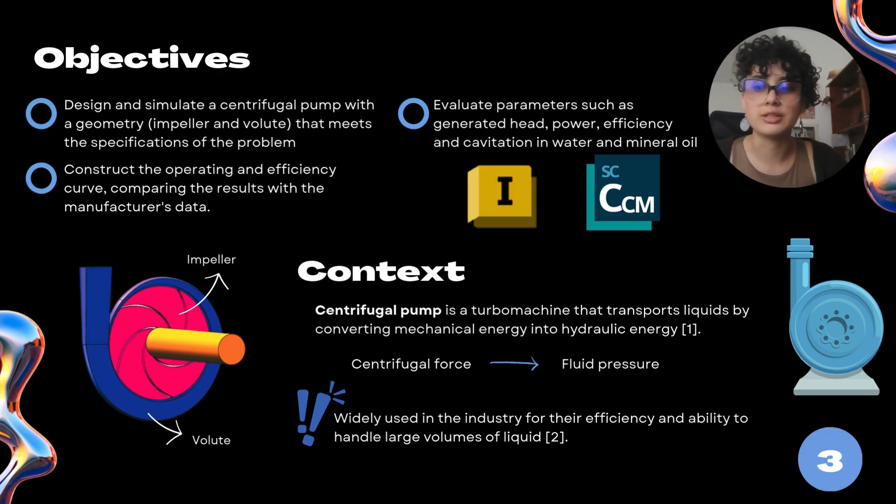A centrifugal pump is a turbomachine that transports liquids by converting mechanical energy into hydraulic energy. It works thanks to an impeller that rotates at high speed inside a volute, generating a centrifugal force that drives the fluid from the center of the impeller towards the outside, increasing its pressure.

What is CFD? Computational fluid dynamics is a branch of fluid mechanics that uses numerical methods and algorithms to analyze and simulate the behavior of fluids. However, the accuracy of these models depends on the correct selection of a turbulence model, refined meshes, and the implementation of realistic boundary conditions. The more viscous the fluid, the higher the friction loss, which reduces the overall pump efficiency.

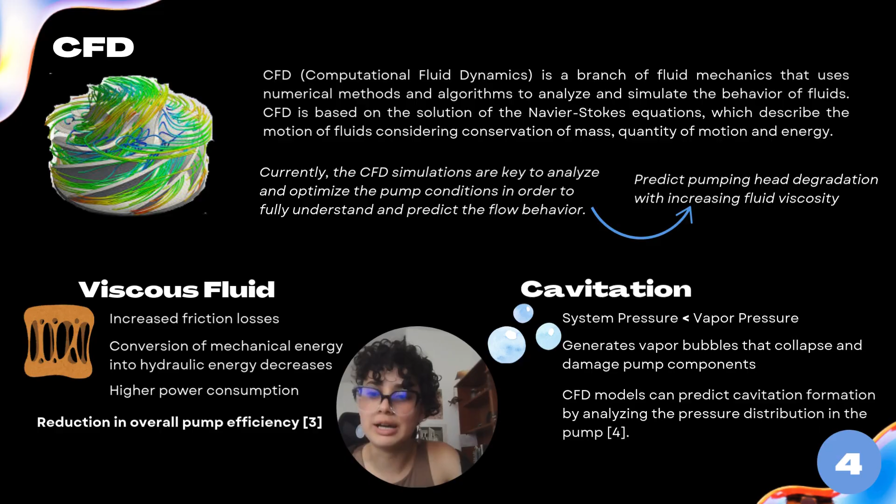On the other hand, cavitation is a common problem that occurs when the pressure in certain areas of the impeller drops below the vapor pressure of the fluid, generating vapor bubbles that collapse and damage pump components. This phenomenon can cause loss of performance, excessive noise, and mechanical failure. CFD models can predict cavitation formation by analyzing the pressure distribution in the pump. Viscous fluids tend to modify the occurrence of cavitation, as higher viscosity can delay the formation of vapor bubbles.

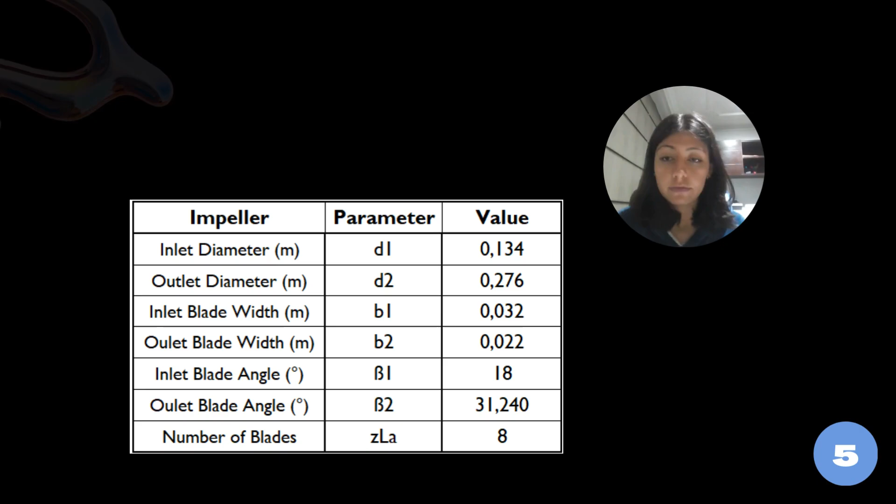For the methodology, first we find different parameters that are used to make calculations for the design of the centrifugal pump. For the mesh selection, we have different mesh assumptions.

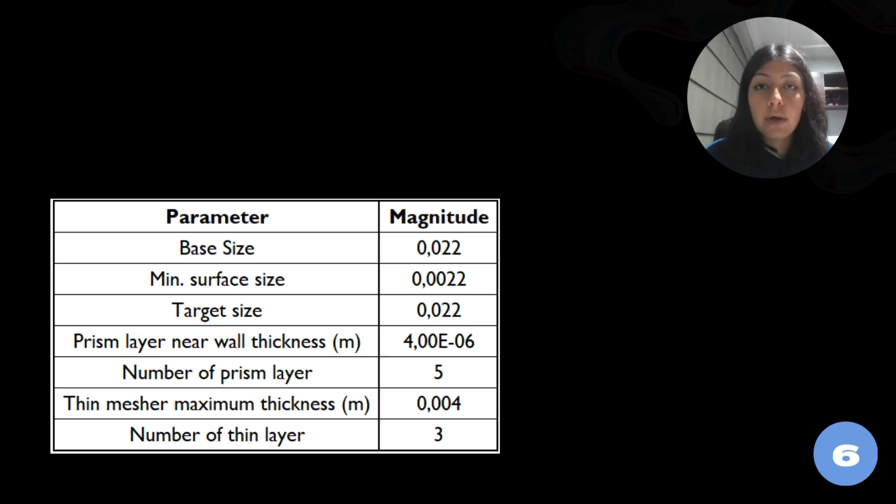In this case, we chose polyhedral meshes, which have fewer cells compared to tetrahedral meshes that, even though they have more faces, the polyhedral meshes present the same results. Next we have surface meshes that have more cells, thin meshes that have more cells in thin areas, and finally prism layer meshes that have more cells in areas near walls.

These meshes capture boundary layer effects to optimize Y plus values for turbulence models, improving velocity gradient resolution near walls, ensuring computational efficiency without excessive mesh refinement.

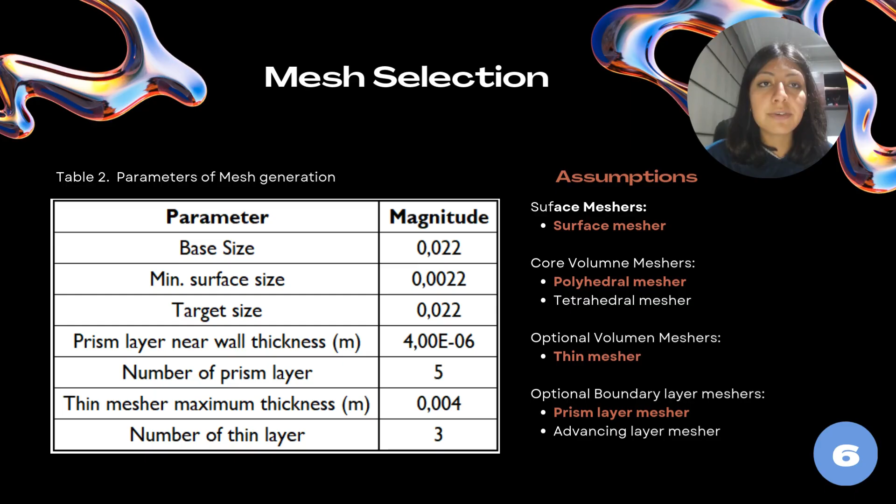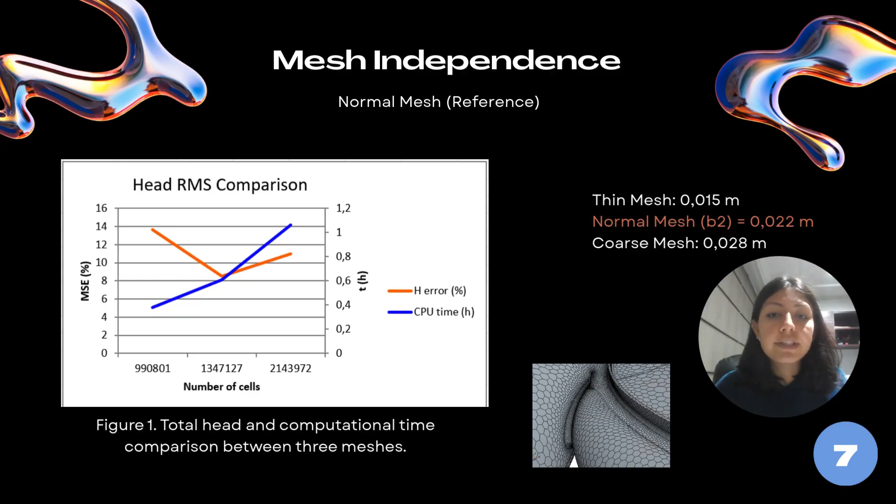Regarding mesh independence, we have a graph that represents the total head and computational time comparison between three meshes: thin, normal, and coarse. For the selection process, it was considered that in the head figure, the mesh with the lowest head RMS error is the normal mesh, while maintaining a reasonable computational cost compared to the thin and coarse meshes. This suggests that further refinement does not provide substantial accuracy benefits, but significantly increases computational effort.

Now, regarding the liquid parameters for water and oil, it's necessary to calculate the Reynolds numbers using the density, viscosity, rotational velocity (the same value for both fluids), and the diameter of the inlet pump.

With this result, we can conclude that these fluids, with respect to the analysis for hydraulic pumps, are in the turbulent flow regime. For this conclusion, we use the K-epsilon model, which is ideal for highly turbulent flows such as those in simulations with Reynolds numbers higher than 10 to the power of 6, offering a good balance between accuracy and numerical stability, correctly capturing the evolution of turbulence in regions near the walls.

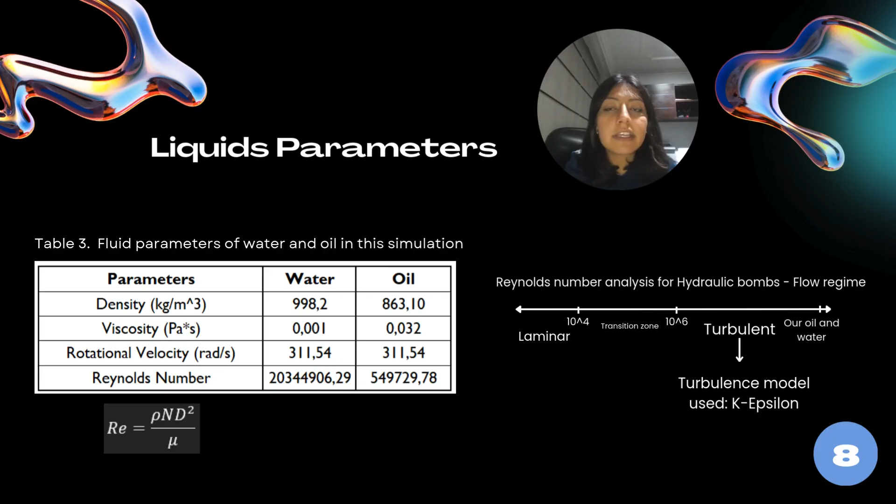These insignificant differences are a good sign because it means that the performance of our simulation won't be affected by changes in the mesh generation.

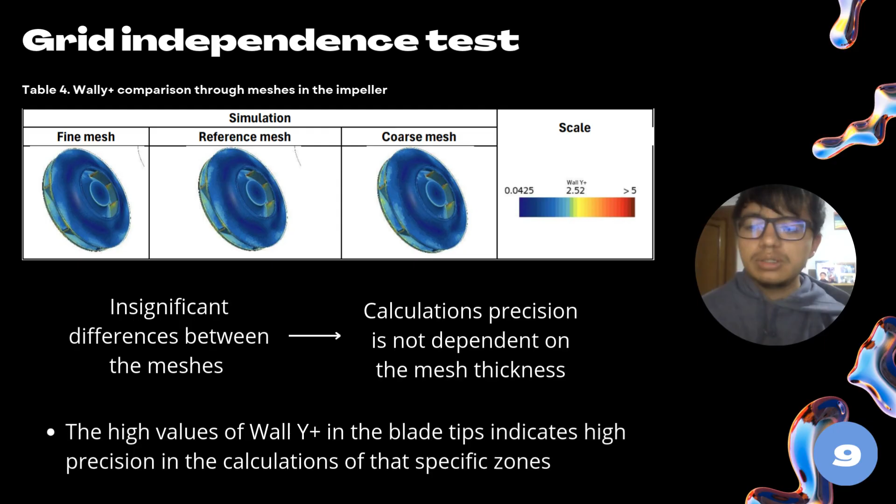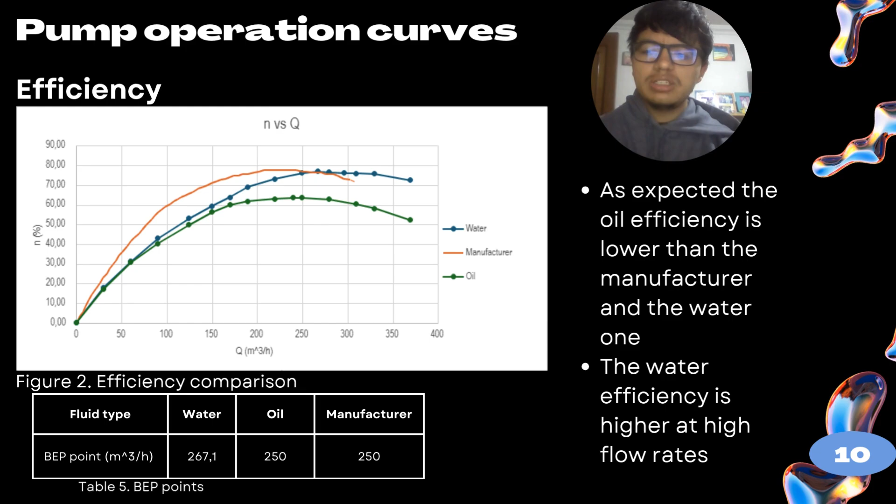There are many factors that can cause this. It may be due to the interaction of steam bubbles, which can cause loss of pressure inside the pump. It can also be due to the difference between the viscosity magnitudes between water and oil. Also geometry imperfections in the pump, or even energy losses due to cavitation, as we will see later in another graph.

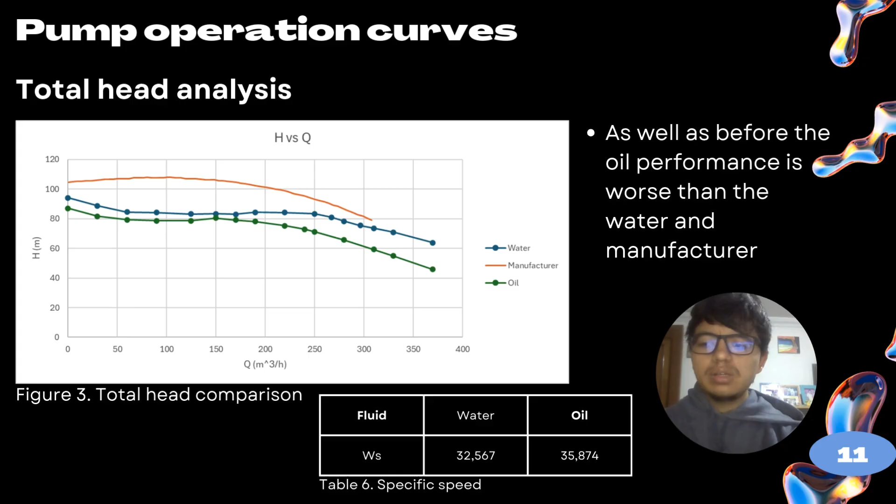Continuing with the results and analysis, it is necessary to do a comparison with the manufacturer data and experimental data. For this reason, I will do a short explanation about the chart.

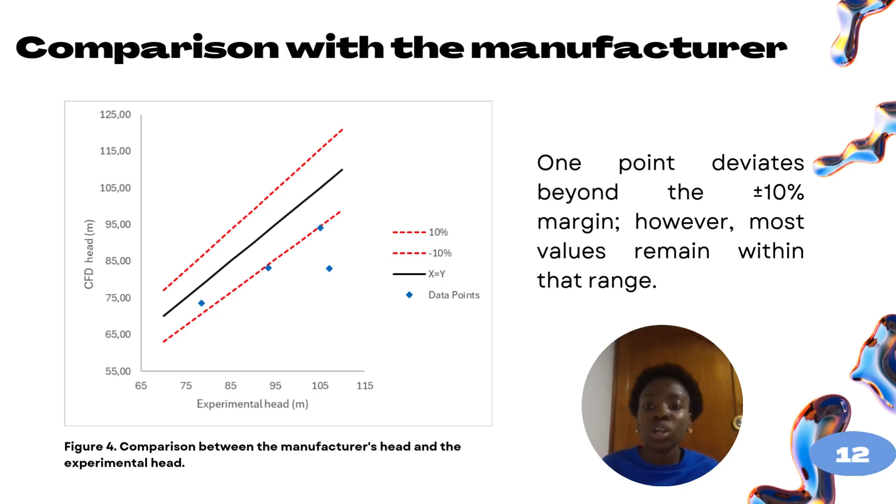A point that falls beyond this plus or minus 10% indicates a notable difference between the CFD head and experimental head results. Even so, most values cluster near the ideal line, demonstrating acceptable correlation.

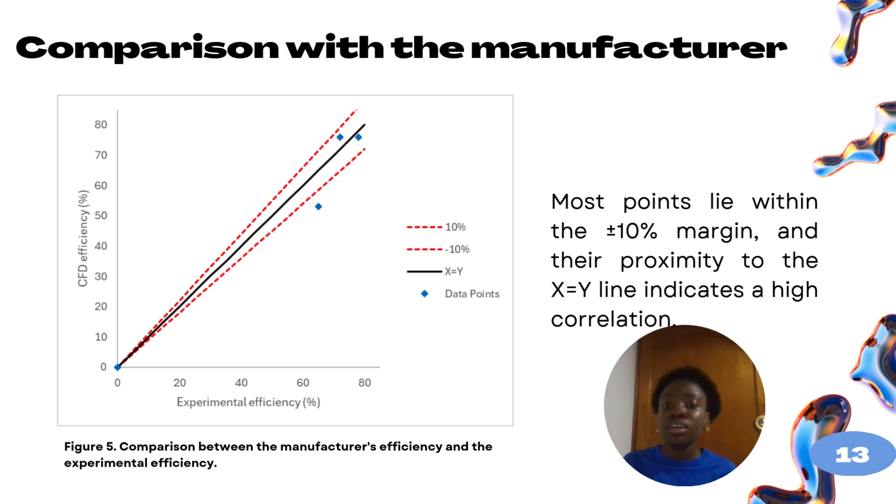Comparison with the manufacturer efficiency and the experimental efficiency: in this case, almost all the points stay within the plus or minus 10% lines, reflecting better accuracy in the efficiency simulation. The proximity of most of the points to the X equal Y line indicates a high correlation between the experimental efficiency and the CFD efficiency values.

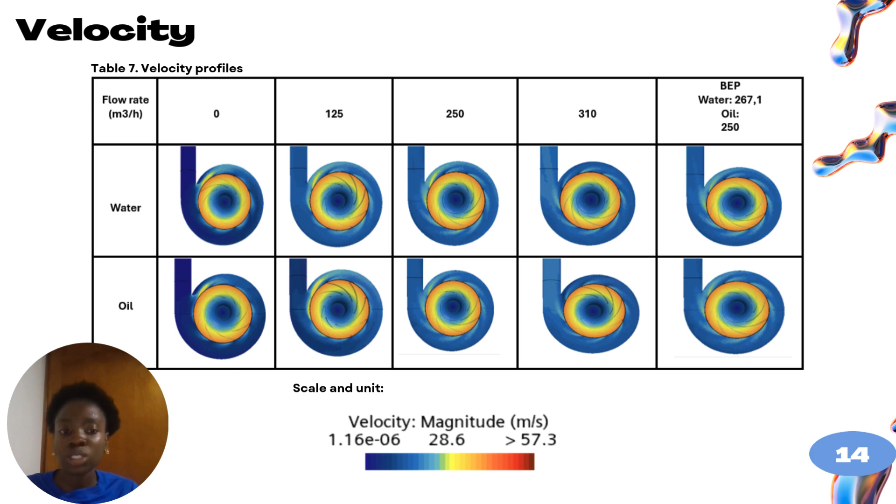This is more precise because you can see the direction of the velocity, but the behavior or explanation is the same as the previous table. However, you can see more detail in this part how the velocity in the impeller decreases when the flow rate increases.

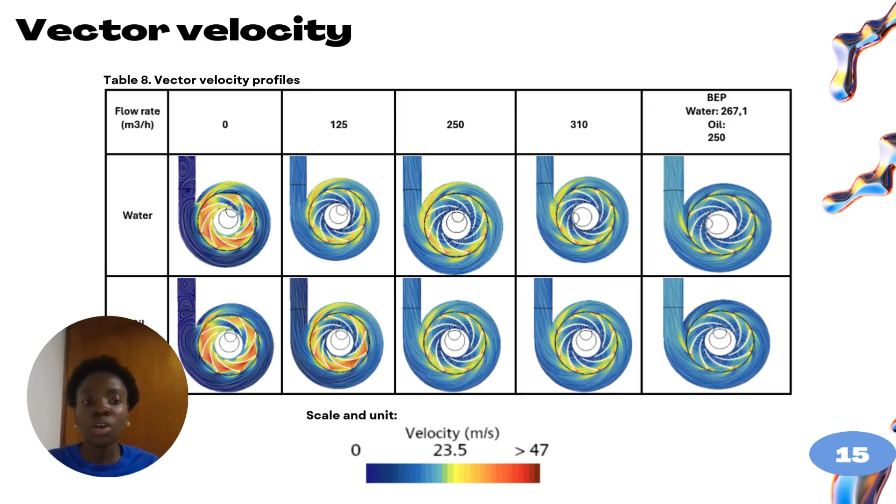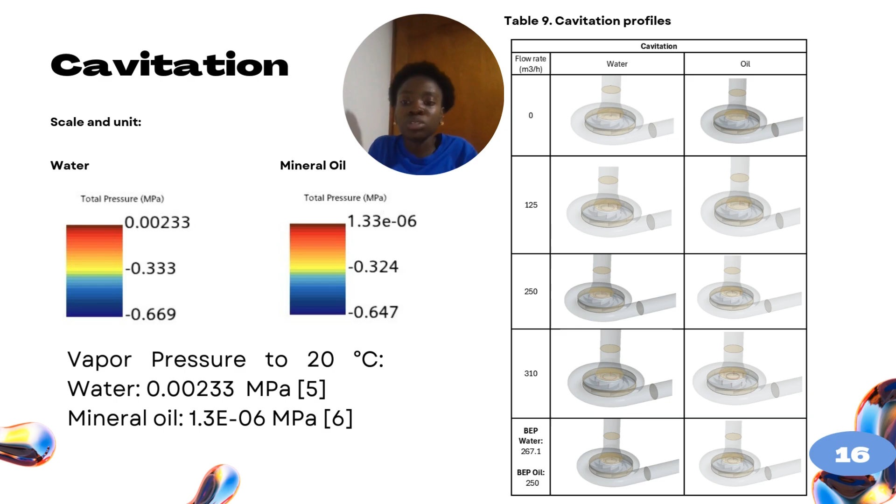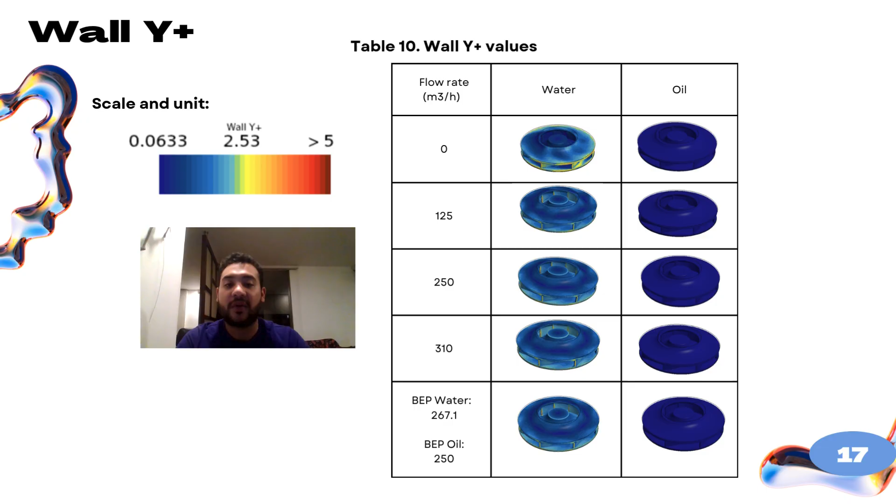In contrast, water's low viscosity allows higher near-wall velocity and a thinner boundary layer, leading to greater wall Y plus variations. There is a clear relationship between flow rate and viscosity in wall Y plus: as flow rate increases, wall Y plus rises, but this effect is more pronounced in low viscosity fluids. In highly viscous fluids, energy dissipation and lower friction velocity keep wall Y plus constantly low.

The goal for this project was to design a functional centrifugal pump. We created its geometry, performed CFD simulations, and analyzed wall Y plus values across different mesh resolutions. We found that optimizing Y plus improves turbulence modeling while balancing computational cost. Finer meshes enhance boundary layer resolution, but the reference mesh provides the best trade-off, ensuring consistent global behavior.

We also compared operation curves with manufacturer's data. The pump performs best with water, especially at high flow rates, while oil reduces its efficiency due to its viscosity and density. In terms of head analysis, we observe that the concavity shift in water and oil curves is likely due to pressure losses from cavitation, geometric imperfections, and viscosity effects.

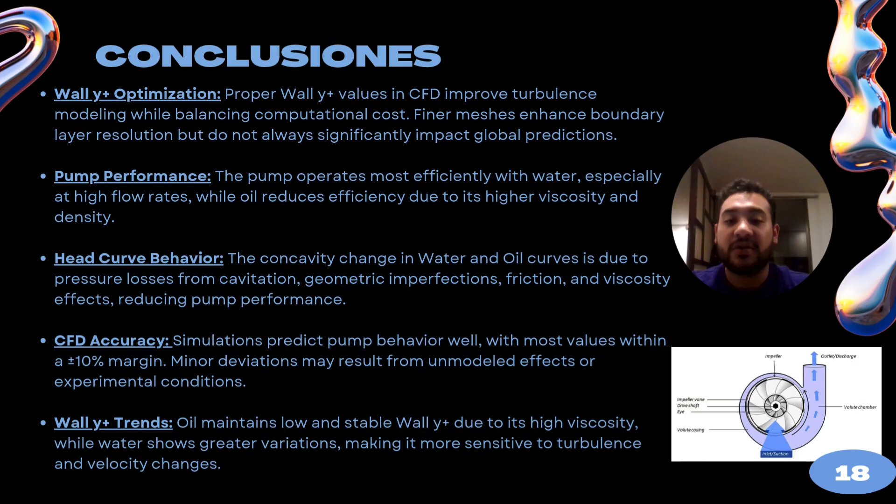Overall, CFD simulations accurately predict pump performance within a 10% margin, with minor deviations due to unmodeled factors. Additionally, oil maintains stable, low wall Y plus values due to its high viscosity, while water shows more variation, making it more sensitive to turbulence.